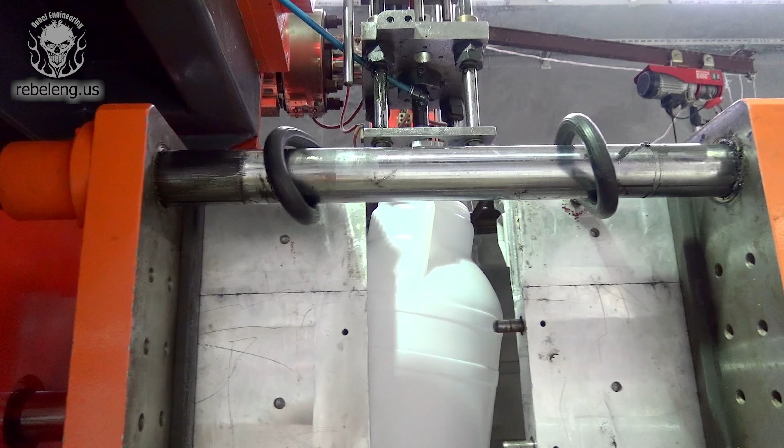That being said, you will deal with some suppliers that have in-house engineering. They'll work with you and they'll help you overcome manufacturing issues. However, keep in mind this is not a design consulting service. The changes they recommend are to make it easier for them to make the part. Sometimes the change they want can be detrimental to your design, so don't just blindly accept what they're offering.

However, sometimes they know something that you don't, so listen to them, because sometimes they can save you a lot of money and a lot of problems. Don't be afraid to ask if they know a better process to make your part. If they have the ability in-house, they'll probably jump on it right away. If this requires sending the part to a competitor, they're going to be a little more hesitant, but oftentimes if they know it's just not a part that's ideal for them, they will let you know.

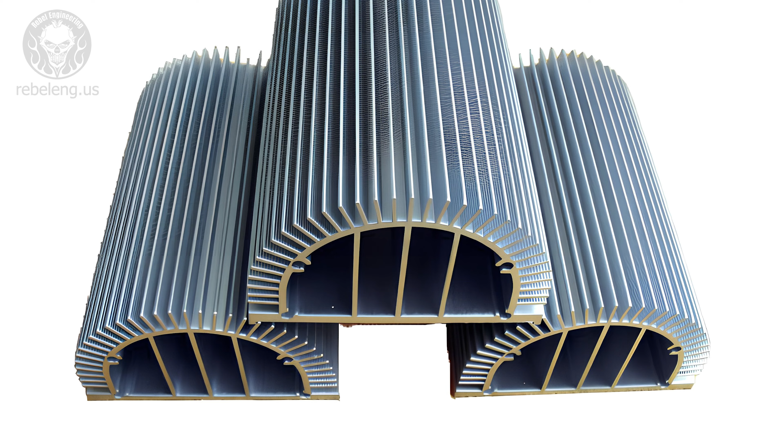For example, if you have a really complicated part, but that part is very conducive to being an extrusion, they may tell you to get the extrusion made, and then they'll just add the finishing features as opposed to machining out of an entire block of aluminum or steel.

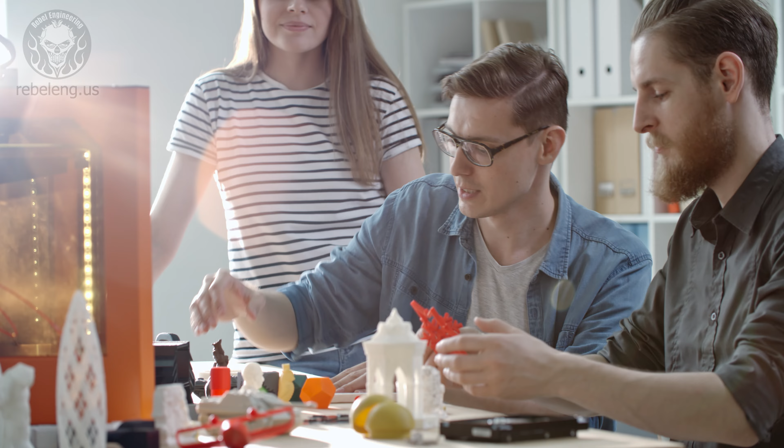Ideally, you will have these engineering skills ahead of time, or you'll be working with an engineer who knows how to modify your product so that it will be production ready. The point is, focus on your strength. And if your strength is not the design of this product, then you need to get the people who can fill in your gaps in understanding.

If you give the manufacturer something difficult, they'll rarely argue with you because they want the work. But that lack of arguing is going to show up in the invoice. If you want lower cost and better partners, you have to understand what they see when they open up the file you send them. Let's talk about designing a product without picking a manufacturing process. This is one of the fastest ways to lose goodwill with your manufacturer.

Many people will send a design of a part to a manufacturer with no manufacturing process in mind. You haven't decided: is this an injection molded part? Is it a CNC part? Is it a die cast part? Is it an extrusion? If you didn't take the manufacturing into account when you started, you're going to end up with a part that is poorly designed for every process.

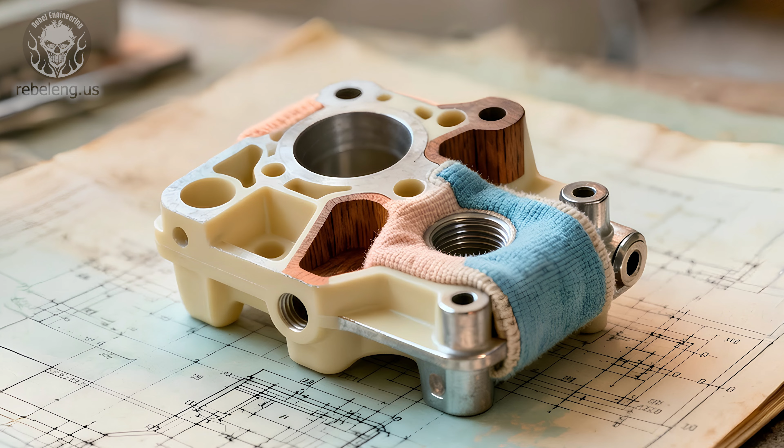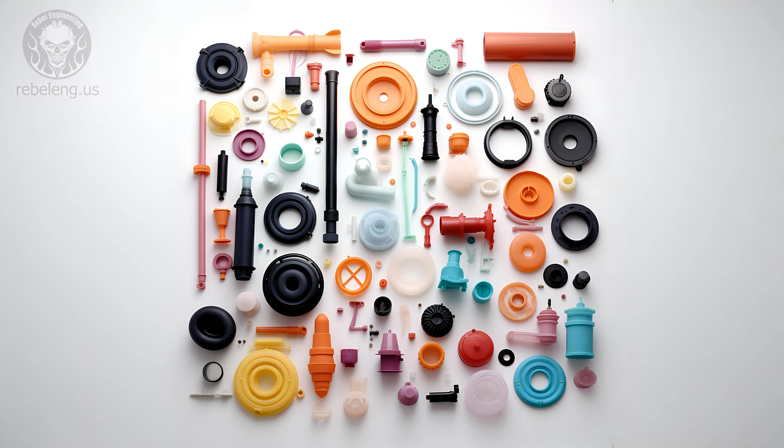Manufacturers hate this because you're forcing them to reverse engineer your intent, not just the part. They're guessing on what the tolerances of the part need to be. They're guessing on the surface finish, and they're guessing what matters and what doesn't. Oftentimes, they won't know how that part interacts with other parts that it will be working with. And unless you give them a detailed explanation, chances are they're not even going to know what the part's for.

When I send out a part, I never tell the manufacturer what it's for. I just tell them the information they need. This is the size, this is the shape, this is where the holes need to be. This is what the material finish needs to be. This is what it needs to be made from. It is not their job to help you design your product.

There are so many aspects of your part that they don't know. They didn't design your product. They don't know the intent. They are not behind it. They are not pushing for it. They just want to make you a good part that meets your spec, that you are happy with, and you pay your bill. Guessing equals risk, and risk is expensive.

Even with this higher pricing, you'll probably end up with an inferior product. Sometimes you'll get lucky, and the part will come back and will do everything you need, and it's great, but luck does not lead to success. Your design always needs to start with: how is this made? Not how should it look.

If you really want to eat up a budget for no reason, specify tight tolerances on all parts. When I design a part, I make the tolerances as loose as they can be in order to get the quality product that I need. In some cases, a feature might be non-important, in which case we can just call it a nominal dimension. If you have a feature that's 2 inches and you don't care if it's a 1/4 inch bigger or a 1/4 inch smaller than that, then call out the tolerance.

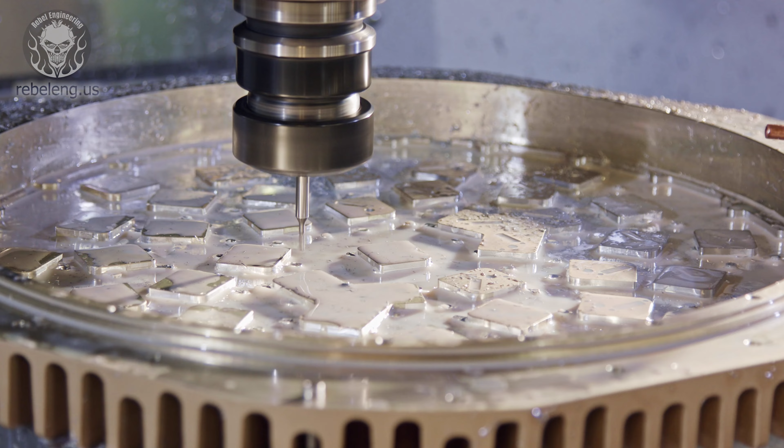Marking this tolerance as such may allow the supplier to use an off-the-shelf material and not have to modify it for your purpose. If you need moderate tolerances, call it out. If you need tight tolerances somewhere, call it out and be specific. Don't ever make your entire drawing list the same tight tolerances. I will be going over several videos in the future explaining how to call out tolerances. It's a pretty big subject, but a very important one.

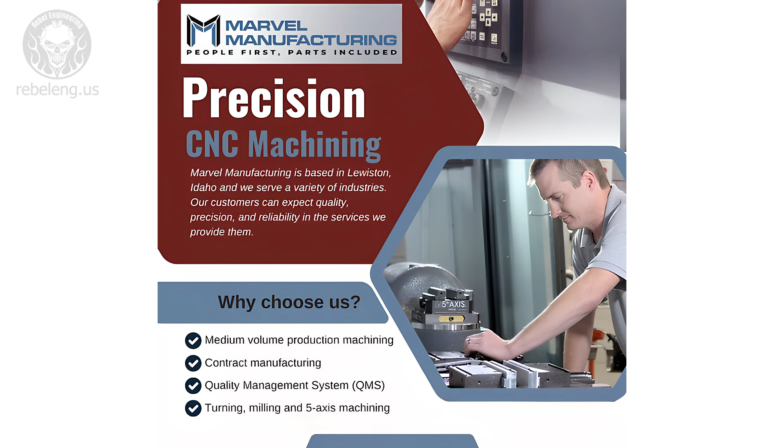So why do people call out tight tolerances in a design? Well, at some point along the line, people got this idea that if you have tight tolerances, you must be making a quality product. Manufacturers love to brag how tight a tolerance they can hold. In some ways, manufacturers are shooting themselves in the foot because they're encouraging the designer to build for high tolerances. Then a manufacturer gets a drawing with tight tolerances, and now they're hating it. These tight tolerances slow down the machine, they make more scrap, and they increase the inspection time.

Most features don't need tight tolerances. When everything is critical, nothing is. You want the manufacturer to focus on the details that really matter. Don't overwhelm them. Good designs are selective. Bad designs are expensive and lazy. It's easy to just mark high tolerances across the entire design because then you know you're good. You could be doubling or tripling the cost of your part just because you're being lazy in the design process.

One basic example that's often overlooked in the design process is putting sharp corners on internal features of a part. It looks clean in a CAD model, but it's a nightmare in real life. For machine work, tools can't make perfectly sharp corners. And if you try to just make it a really small corner, you're using really small tools, and they cut very slow and they break.

In molding, sharp corners cause stress and they cause cracks and breaking. Manufacturers see sharp corners and they think tool wear, rework, and failures. Take the time to add fillets to your design. Fillets are a nice rounded edge that you put on parts. Not only do they make parts easier to produce, they can also look nice on the finished product.

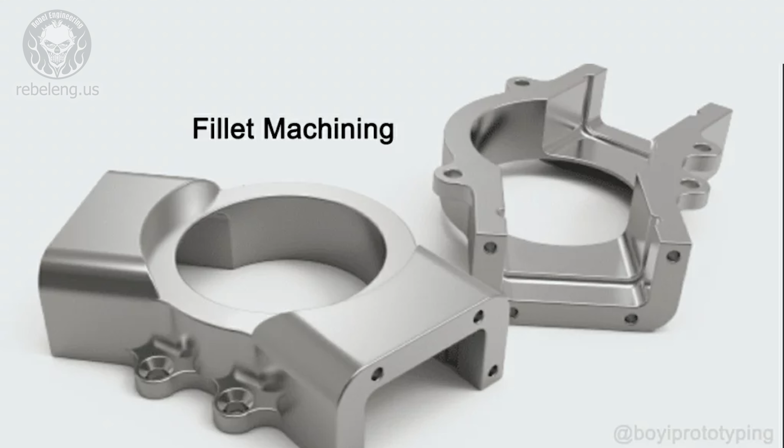Internal fillets can significantly reduce the cost of making a part, especially for injection moldings. External fillets can sometimes increase the cost of the part a little bit, but they can add to a nice finished look. Just make sure you use standard fillet sizes so that the manufacturer can use standard size end mills to make your part or mold.

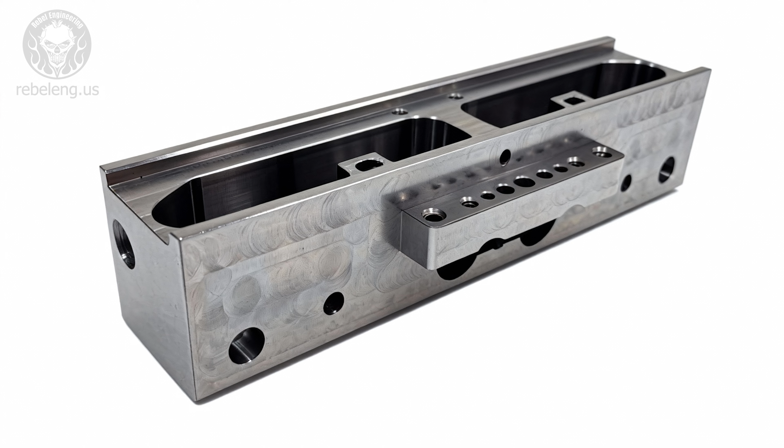Don't overcomplicate a part for no reason. You're not trying to win an art contest, especially if the part's not going to be seen. This can include organic shapes or complex curves. For these simple functional parts, keep them simple, with squared corners and no additional features. Don't put tight tolerances on a surface that doesn't serve a function. Keep your aesthetic designs to only places where it truly matters.

Manufacturers hate excessive complexities. This increases cycle time, requires special tooling, and increases the number of failed products that are going to be made. Every surface on a part should have a reason. If that reason is that it looks cool, be ready to pay for that option and make sure it's worth it.

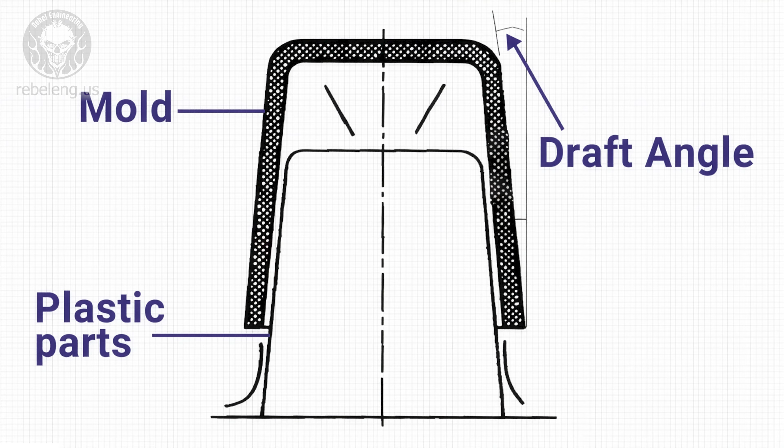If you're making injection molded parts, make sure you don't ignore draft angles. Draft angles are slight, deliberate angles put on the vertical surfaces of a part, around 1 to 3 degrees, in order to make the part easier to remove from the mold. These are necessary for injection molding, casting, and thermoformed parts. These also prevent scratching when the part comes out of the mold and reduce warping. Many designers forget to add these features.

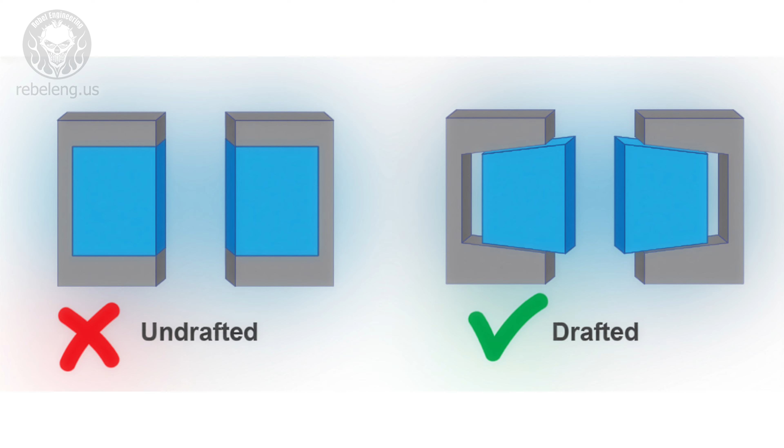Generally, if you can design a 3-degree draft angle into a part, you're pretty good across the board. For precision parts, you may be able to go down to 1/2 degree, but you're going to pay for this. Improper draft angles lead to parts sticking in the mold, ejector marks, or damaged tooling. If you submit a part to a manufacturer without a draft angle on it, they're going to know that you don't know what you're doing. They're either going to insist that you modify your design or try to make it as is, and it's going to be very expensive. This is such a basic step.

The last thing you want to do is look really dumb to your supplier, because if you show up not knowing what you're doing, they're not going to want to take your work as much as someone who does know what they're doing, because you're going to look like someone who has to have their hand held and is going to need a lot more time and expertise in order to get your simple product up and running.

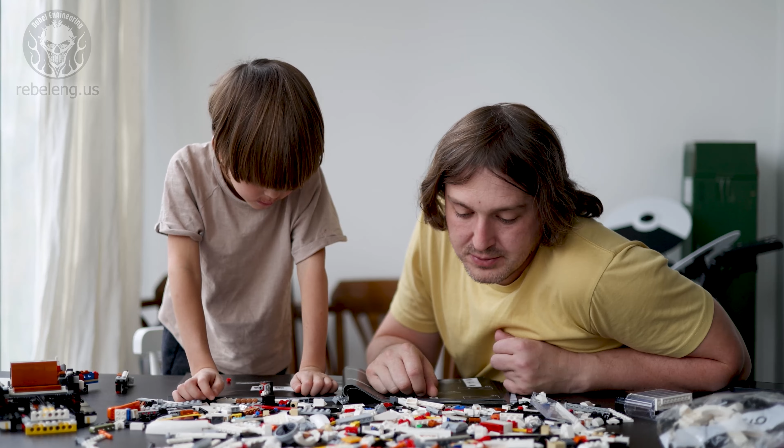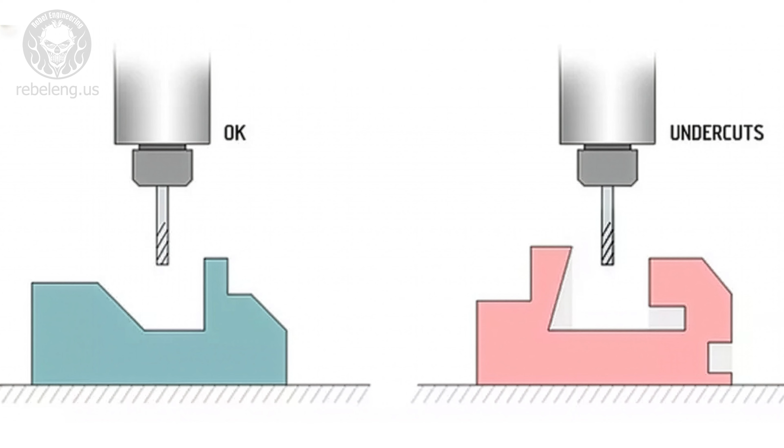Another feature that they really hate is undercuts. And sometimes you do this on accident. Sometimes undercuts are needed, but you need to avoid them whenever possible. These are features where you have to come in with a tool and cut underneath something as opposed to cutting straight down. Machining this is very time consuming and may require special tooling.

In injection molded parts, you not only have this complicated tooling, but you end up with an injection molded part that won't come out of the mold unless you make special slides and releases or complex multi-part molds. Sometimes these are just a small lip or a recessed fastener or hidden feature. Oftentimes, it's easy to just fix this in the design stage and never even have to deal with it in manufacturing. Once again, making unnecessary undercuts is going to make it look like you don't know what you're doing.

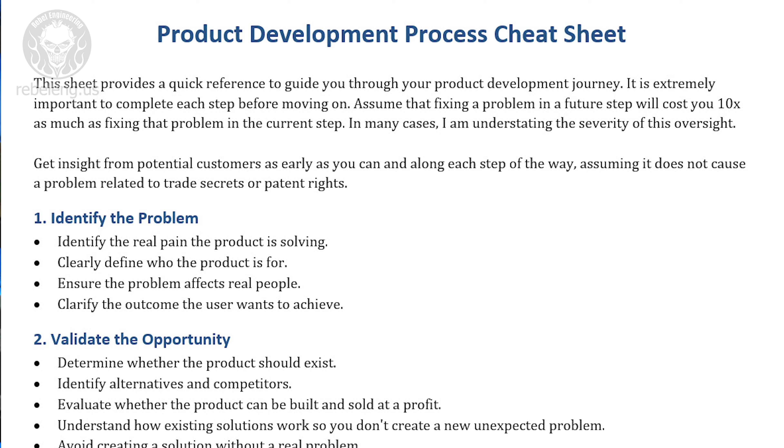Another killer is trying to make every surface on something look cosmetic. Not every surface needs to be perfect. And in fact, many of the surfaces, or maybe most of them, will never even be seen by the end user. However, many people like to treat every part as if it's a showpiece. If you've ever disassembled a car, you'll realize the further you dig into a car, the rougher the parts start looking. This is not a design flaw, it's just unnecessary because you were never meant to see it.

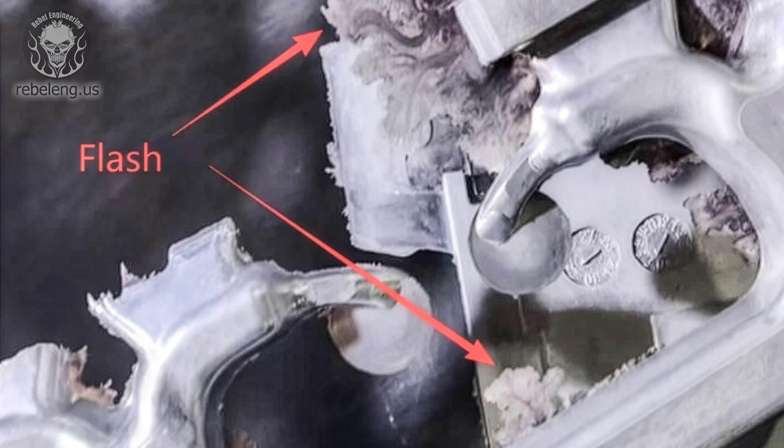For hidden parts, you can usually just use a raw machining, or maybe even a casting that still has some flashing on it. When I have aluminum parts made, I usually just have them sandblasted and anodized. It's a fairly simple process, it's uniform, and they do it all day long, so it's not that expensive. So if you need special surface finishes, that's great, but be very intentional and be ready to pay for it. When making injection molded parts, having a surface that's textured or highly polished is expensive, so make sure you call that out in just the feature that requires it.

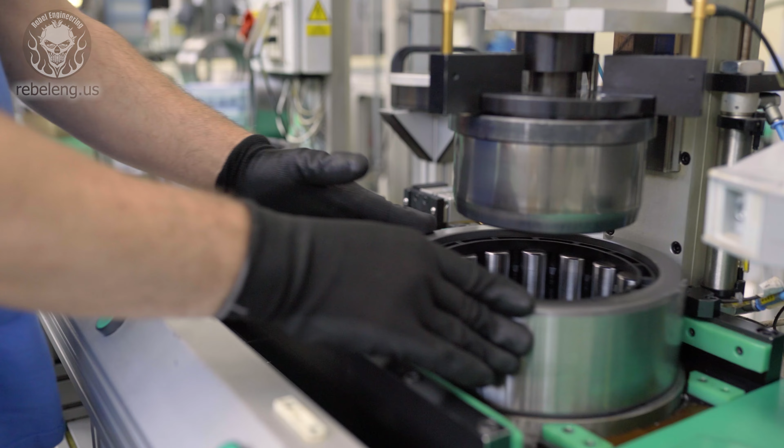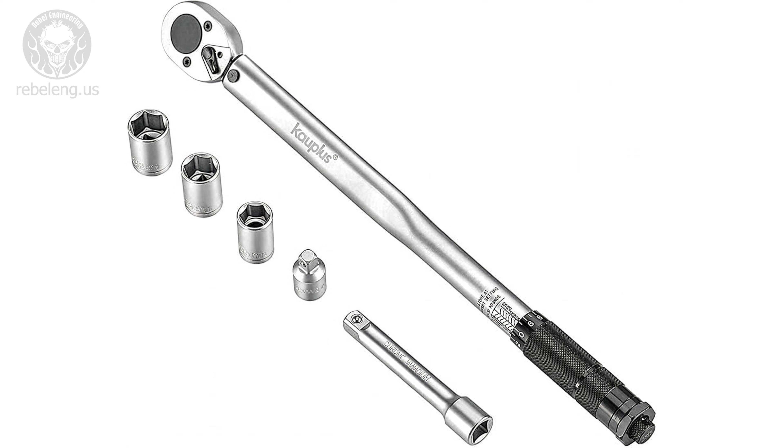So now it's time to talk about the assembly strategy. At some point, all these parts you've designed and manufactured have to come together. This might be done by you, it might be done by the manufacturer, or it might go to a third party. You should know how all these parts go together, in what order, and how they will be held in a fixture for assembly. You need to know the torque specification of every fastener, and also know anything special, such as a surface that must be cleaned before it's glued or painted. Don't wait until all the parts are made to figure this out. You should be 90% of the way there before you even go to manufacturing.

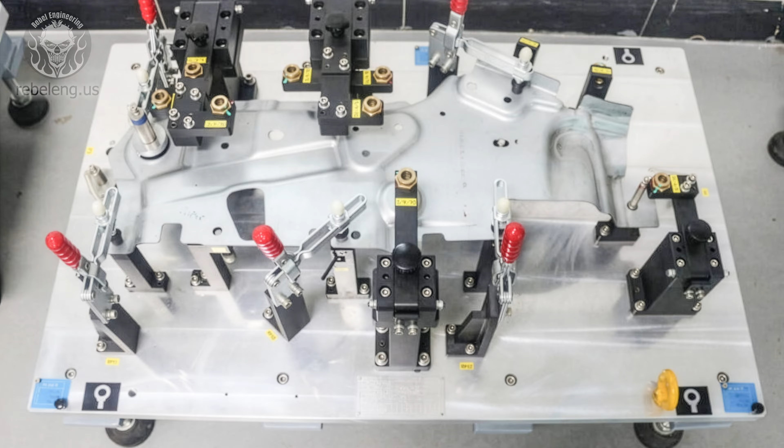Making proper fixtures is very important. Your fixture needs to have proper alignment features so a part can't be put on wrong. Don't ever rely on the assembler to properly align a part. The fixture should hold the part in the way that is easiest and quickest for the assembler to put it together and the least likely for them to make a mistake.

Standardize parts wherever you can. This leads to a reduction in error, speeds up assembly, and reduces the number of tools necessary to assemble your product. It's always fun to customize your product, but manufacturers love repeatability. Every unique part means separate tooling, separate inventory, and separate quality checks. Add just one small option to a finished product, and you can double the amount of inventory you have to carry. Make 2 small options on every given product, and you now have 4 times as much inventory you have to carry. Make sure these options are necessary. Oftentimes, giving a customer too many options will actually reduce your sale because you're asking them to go through the trouble of figuring out the differences and which one they need.

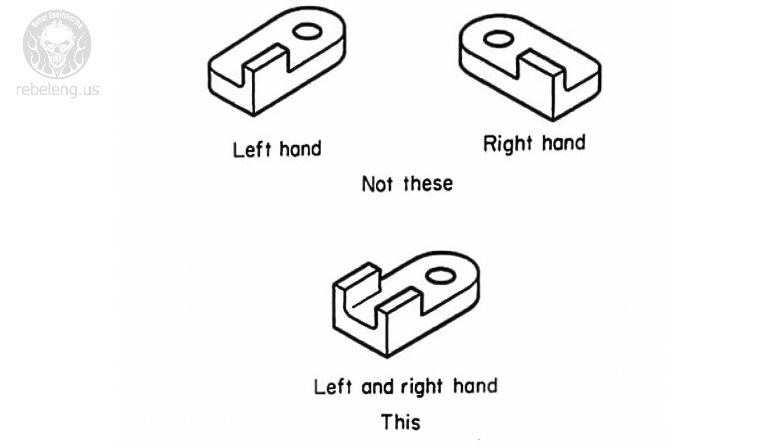If 2 parts can be made the same, do it. If you have a right-hand part and a left-hand part, and you can put the right-hand and the left-hand features on the same part, you can cut the amount of parts you need in half, because you can use that part in both places. This can cut your tooling in half, this can cut your inventory in half, and it's going to make your assembly line cleaner and easier to use because there's fewer parts to grab. The customer doesn't see this standardization, but your pocketbook will.

Don't use exotic materials for no reason. Some things sound really impressive. This product is made of Kevlar, billet aluminum, nanotechnology. The list goes on.

In addition to high material costs, special materials can lead to long lead times, be hard to procure, or require special handling. If you need the wow factor, great, but only use it where you need it. Use exotic materials in strategic ways. Use them where you're going to get the real bang for the buck out of them.

Manufacturers prefer to use materials they know. When you add something special, this adds an entire supply chain logistic that they are not used to dealing with. Risk equals cost, and they know it. Manufacturers love predictable processes. They hate parts that require hand trimming, manual bending, or just tweak it steps.

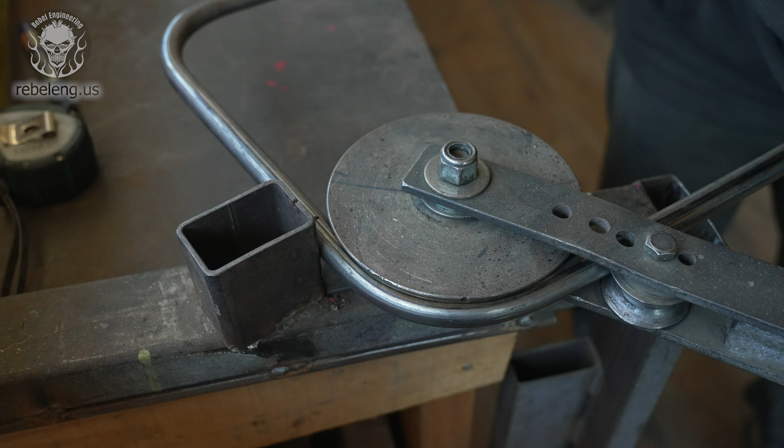Sometimes this is unavoidable. Even today, in advanced automotive manufacturing lines, they still have a guy who hand tweaks the door to make sure it closes right. They used to do this by adding some shims and putting a 2x4 in the door and slamming it in just the right way until it aligned. That was 100 years ago. So now, they basically have a little piece of metal that they bend, which is essentially the same thing that they were doing 100 years ago.

Sometimes this manual work is unavoidable, but it does lead to inconsistencies. So do it only if you have to. These types of steps are going to require the most skilled and the highest paid worker on your entire assembly line. If the part can't be automated or easily assembled, the manufacturer is going to pad the quote accordingly. They're not being greedy, they're just being realistic.

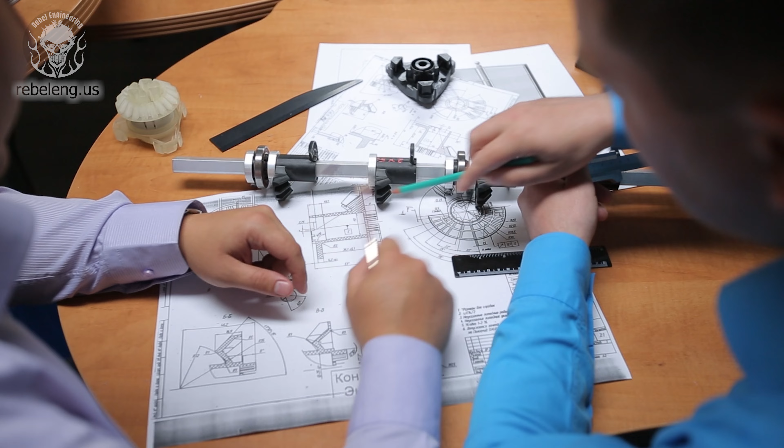This isn't just for beginners. Advanced engineers can fall into the trap of designing for performance, elegance, or looking at theory over reality. Manufacturers are not impressed by cleverness. They're impressed by simplicity and repeatability.

This gets us to the big problem that no one says out loud. Manufacturers hate designs that ignore them. This isn't an emotional, special snowflake situation, it's just reality. These are designs that don't respect process limits, human limits, and cost limits. These are designs that will fight the production process every step of the way.

But here's the turning point that most founders miss. When you take on a manufacturer, they are your partner. Make yourself as easy to work with as possible. Be that customer that they pick up the phone for every time you call. Don't waste their time with things that you should have figured out before you went to them.

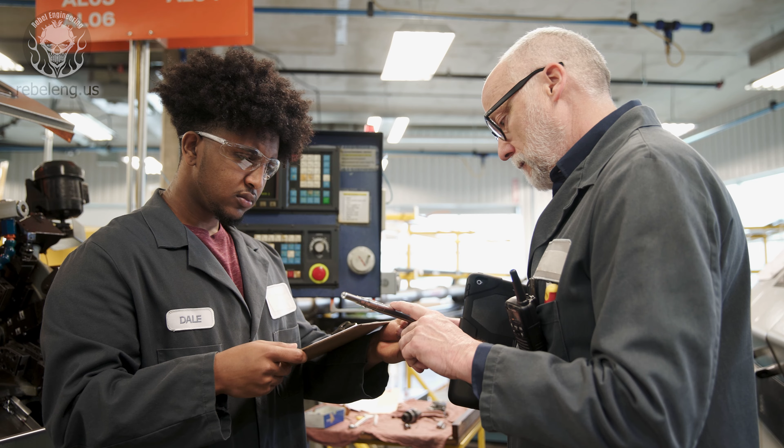Once you've gone as far as you can, ask them for their input. And I'm not talking about input on your design. I'm talking about input on what you can do to make it easier for them to make the part for you. Manufacturers love when you give them something that is simple, clear, and repeatable. They love when the tolerances are intentional, the materials are standard, and the assembly is easy. Those designs feel safe. They know they can do the job, and it'll pay their bills, and they can move on.

The last thing a supplier wants is to look at a design, know it's going to be problematic, know it's not going to come out right, and then have to deal with the backlash. No one likes a problem customer.

But here's the one thing that changes everything. Before you finalize any design, ask yourself, if I had to make 10,000 of these myself, would I be hating life? That question exposes overcomplexity, fragility, and wishful thinking. If your answer is yes, what do you think the manufacturer is going to feel? If you want honesty from your supplier, earn it by being better.

Avoid being that guy. That doesn't mean you have to be perfect. It just means you need to be aware. You need to be willing to listen, and you need to be willing to work with them to try to simplify the product and process. Manufacturers respond to effort, and they will do what they can to help you along the way.

Here are some things to consider before you send your files out for quote. Designs that respect manufacturers get rewarded with lower cost, quicker turnaround times, better relationships, and an overall better experience. Those advantages compound pretty quickly when you're trying to run a business.